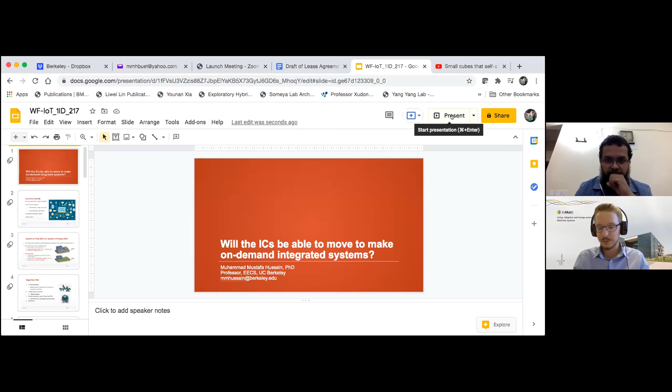So let's start with our first speaker of the day in our first session, who's going to give us an idea on how to make soft robots move. I'm happy to welcome Muhammad Hussain, who is a professor of EECS at UC Berkeley and was a founding professor of electrical and computer engineering at KAUST. Now this is your floor, Muhammad, and welcome.

Thank you, you can hear me clearly, right? Yes. Okay, very good, welcome everyone. I'm connecting you from Bangladesh at the moment and I'm going to fly out for San Francisco in less than 12 hours, so it's kind of a rush moment for me, but I'm very happy to be here because I would like to learn a lot about this robotics, and I do believe that there is a lot that can actually be done.

So here is the perspective that I would like to first present. Increasingly, we are living in a world where computers are not only used for computing, they are basically now being integrated into most of the things that we know of. And as we go forward, we know that there will be more and more biology integration, and that's where we see the Internet of Things as well as the Internet of Everything.

That means there is increased demand for hyperintegration. So there are two things happening at the moment: there is data management, and then there is data collection and data-based decision execution.

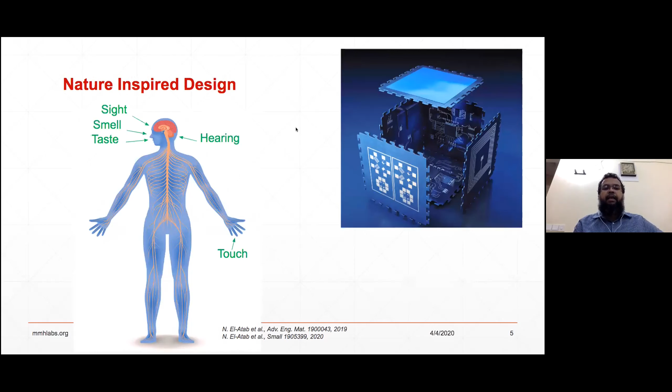But in our case, what I thought is, look at us, right? Most of our sensing organs are basically outside. Obviously our tongue is inside, but our ear, our eyes, our nose, those are outside. Our tactile sense, the touch, the temperature, the pressure, those are essentially in the skin, which is outside. But at the same time, our brain, our memory and logic part, is inside.

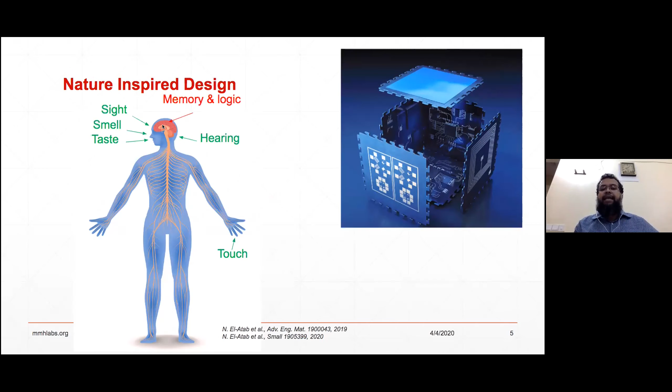That inspired me to think differently: if we use the substrate, the electronic material that we use today, on only one side to build devices, why not use the other side the same way? So we're building electronics where the sensors, energy harvesters, antennas are outside — here are the antennas, here's the solar cell, here are different kinds of sensors — but all the data management circuitry, the ICs, the battery, are basically inside, exactly like our body.

So what are the key characteristics? We are using thin film based components, using both sides, so it's area efficient. It's also cost effective since we're not using different substrates. It allows us to mix and match, because one side can be based on one material — say 3-5 material, just as an example — and the other can be made with silicon, which is 90% of electronics today. So I can do heterogeneous integration of materials and devices.

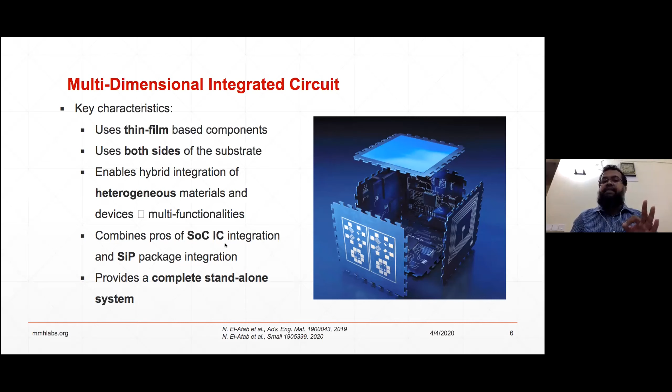It basically combines both system on chip and system in package, but they're essentially a standalone system. Here you can see the actual image of these systems, where all the sensors are outside, and the inside has the data management circuitry. Now, how are we doing it? We have wafers, we build devices, flip them upside down, build other devices, connect them through silicon vias, then we dice them and package them.

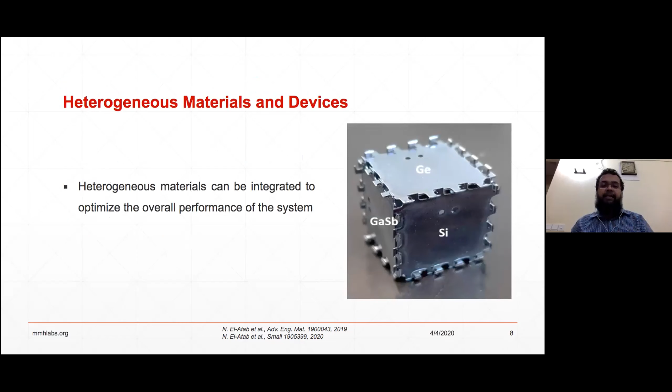As an example, this is a germanium-based substrate, this is gallium antimonide, and this is silicon. We call these multidimensional integrated circuits, because unlike 3D where you stack one silicon-based IC on top of another, here we can have different kinds of ICs and control different shapes, since the cubelet isn't only one shape. I'll show you that we can make pyramids, hexagons, octagons, different kinds of shapes. We've taken this approach because we expect them to act like robotic cubelet pieces.

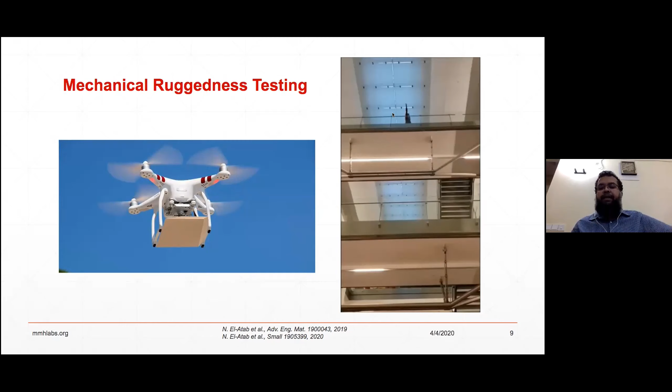For mechanical ruggedness, we did shock testing — from a 15-meter height, we did 10 drops — and the shock is absorbed by the PDMS or polymer-based encapsulation, which is mechanically robust. You can see here these UAVs: we took them, flew them up with the ICs attached, and dropped them off from really tall buildings, and we saw that they can absorb the shock.

So here is an example of this standalone system. It essentially has a temperature sensor, and it also has an LED, a microcontroller, and a battery.

The way that it happens is when the temperature is above a threshold, which we set at 30 degrees Celsius, the microcontroller turns on the LED. So you can see that every time the temperature went above that threshold, the LED was basically on.

Now if we move forward, here you can see what it looks like inside and how we're covering them. If you compare this with the video you saw earlier, that video had cubes which were essentially 5 centimeters. But now we are having 2 centimeter, 1.5, 1 centimeter, 8 millimeter. And this is a medical pill, a capsule. Then we have the 5 millimeter and 3 millimeter.

So essentially what we'd like to say is that these are scalable. Ultimately, they are a standalone system and they will be able to move, and then like Lego blocks, they are going to mix and match with each other to create a far more hyperactive integrated system on demand, where we can drop them off and they can assemble and reassemble themselves to have systems with on-demand manufacturing, and we don't need to actually be there to create a complex system.

From a scalability standpoint, I'd like to also show that the MDIC, or multidimensional IC, that we just showed, the stacking reduces the footprint by a factor of 12 compared to the traditional PCB, which is the ideal case. Just as an example, if I use the traditional system in package, I will need to build a system where all these different components have to be placed side by side monolithically in a lateral fashion. But the way we showed in this case, the cubic MDIC can have far less area consumption, so it's area smart, and because we're using two sides of the substrate, we have more advantage in terms of cost.

So here is an example of these water sensors on the outer side and solar cell on the upper side, with air sensors and encapsulation for floating capability. So what's happening here, as you can see, when we dropped it off, it had a certain kind of weight, the mass, and it essentially allows it to take the sensing side and immerse into the water. It's getting the water's pH, temperature, as well as other chemical concentrations from this water, which is very important for water security.

The way we've designed it, whenever the sensor side goes to the bottom, it's immersing in the water, while the solar cell side is always looking at the far face, the frontal side, so it can get sunlight to have the energy harvested.

So essentially what I would like to say is that when we look at robotics or soft robotics, we see that it's more and more an engineering of nature. We are learning from nature, and then we are mimicking that through engineering.

We do believe that the multidimensional IC, this new design concept for integrated circuits and electronics, will be able to be part of this journey, to assemble themselves, as well as multiple of them assembling to form far more complex integrated systems on demand.

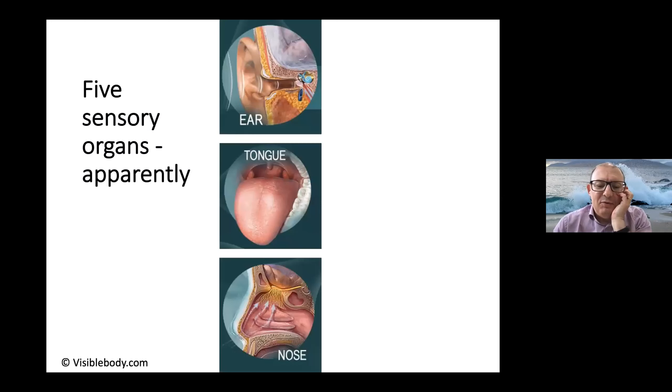But I don't think that's the topic of this talk today, so I'll skip that. So we have 5 senses apparently, and we also have 5 sensory organs, apparently. We have the ear, the tongue, the nose, the skin, and the eye itself. I say apparently because there are still a lot of questions, some are being elucidated.

I don't know if you're familiar with the recent work done in Nature concerning magnetoreception of pigeons, where there's an increasing body of evidence that you have a magnetoreceptor in the brain that provides pigeons with an idea of how to align themselves with the magnetic field of the Earth. That is, you will not find that in the sensory organ. I think there's still much to be discovered, but this is the conventional wisdom at the moment.

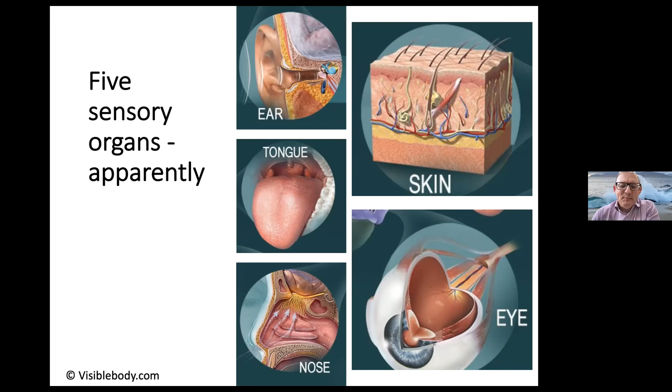It's always possible when you look at a sensory system to describe a functional schematic. You start with the sensor itself, which can be rather dumb by itself. The sensor will be stimulated, but you need some sort of data receiver, either coming from the sensor itself or something directly activating the sensor for information. You need to build an interface in order to get to your cognitive processing system, that is your brain.

Following that sensor, you might decide to have some actuation, or you might get information which will be going to your brain, and then this is a reaction that you're going to give to the system. So I'm trying to describe this functional schematic in order to maintain that sensory system.

You need some energy of some form, and there was a very nice work by Robert mentioning the combustion and other aspects of energy that you need. But you also need to be able to procure that energy in one way or another, procure it to the sensor, and also to store it and manage it.

And all that is underlined by a kind of knowledge base or firmware, if I take an engineering viewpoint about what that sensory system should be. In order to select whether or not the information is relevant to the cognitive processing system, you will have some criteria that you use to regulate all that and to have relevant information.

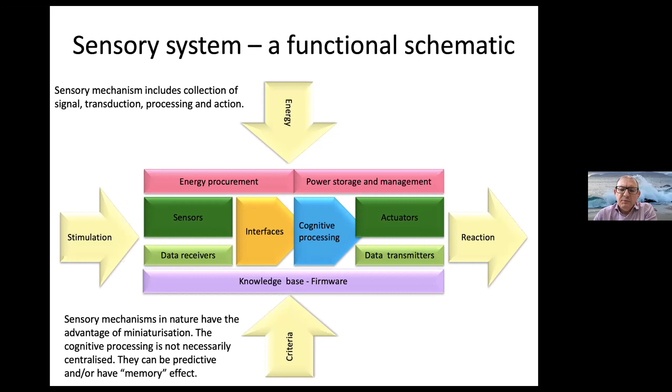It doesn't mean that because you have a functional system, this functional system cannot be broken into different parts. You can have parts which are in one part of the body, and one part which is completely outside the body - by body, I mean the robotic system you're going to have - or it can be fully embedded into it. This allows you to have some reflection, and then you can build this kind of workflow that Robert was mentioning, which is quite interesting, in order to make sense of the various parts.

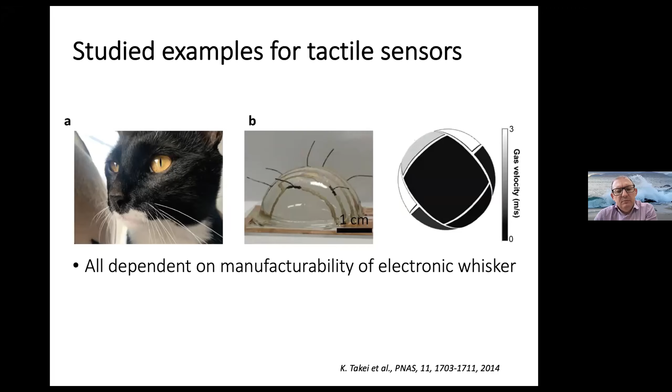Great work has been done, but it all depends on the manufacturability of these electronic whiskers. There seem to be, in my view, sensors which would be quite difficult to replicate on a mass manufacturing level. They tend to be quite fragile, so I'm a bit worried about the robustness in real life application. Don't get me wrong, I don't want to belittle that work. It's great work, but I'm trying to look at whether it would be working in real life applications, in the thousands, if we were to use it for biorobotic systems.

Another example is the actual sensor based on cracks - you can see the small arrow here. If you look at the broader picture of one of the legs of the spider, you have this kind of crack, and what you're relying on is looking at the variation of voltage as a consequence of this crack, which gives you an idea of the movement. So you rely on an imperfection, a voluntary imperfection of the actual system, in order to detect.

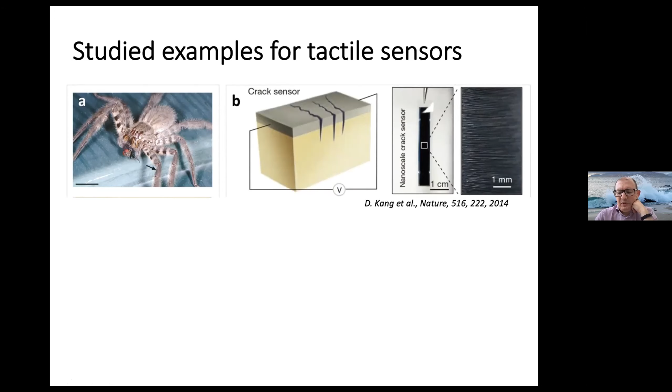Getting some haptic feedback. And again, it depends on the manufacturability of the crack-based sensors. So that is one aspect of it.

Dr. Kang created very nice work based on a carbon nanotube, if I'm not mistaken, or graphene. You want to look at the reliability in real life application - how many times those cracks can be used, how many cycles they can be used reliably, and whether you get reproducible results. This is some work I've been doing: instead of using cracks, looking at this kind of wrinkled metal layer, which has survived 1,000 cycles with bending of 180 degrees without any deformation whatsoever. I'll explain that a bit more here.

Then you have this other example of pressure sensors, this time based on the porous structure of a sponge. You have the very classic system where you have a porous structure embedded into an ITO film, and this very classic picture concerning the pressure on one side and the actual output response on the other side. You have these two curves, which are very classic of nanostructure layers you'll find, for example, in a piezocapacitive sensor or other type of sensor - this case being a piezocapacitive sensor.

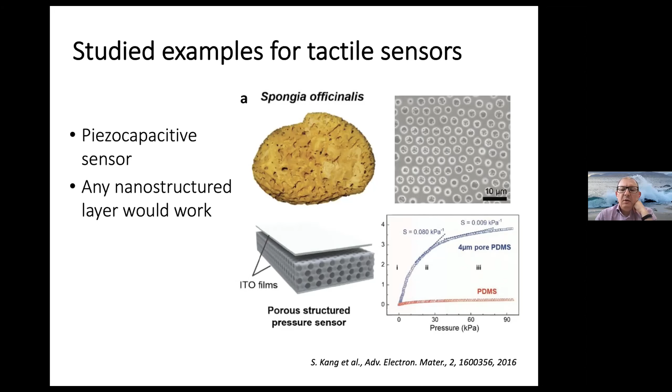Looking at all these examples, and I've spent a bit of time on that talk - over and above accuracy, you need specificity, selectivity, and so on. You will want to know what are the ideal specifications for your biorobotic sensor. First of all, you would like to have decentralized control if you can - that is, be able to have a sensor for which the intelligence is very nearby or even embedded, because that's something we have, for example, in our body.

You want to have something which is also self-powered and self-interrogated. By that, you will want power that doesn't come from the mains, something very close by as well. You want something robust and reliable - and I mentioned some of the sensors presented might not be the case. You want to have what we call built-in self-test, which is quite common in microsystems in general and also in electronics - the ability to auto-calibrate itself, but also to look at failures which could happen, and allow your sensor to fail gracefully when it's close to the end of its life.

But also something which has built-in self-repair. And again, Robert mentioned this kind of self-healing material - we have that happening just now in microsystems, in MEMS. It's been there a little while in electronics, not as much as we would like, but it's something I think we should have for these sensors.

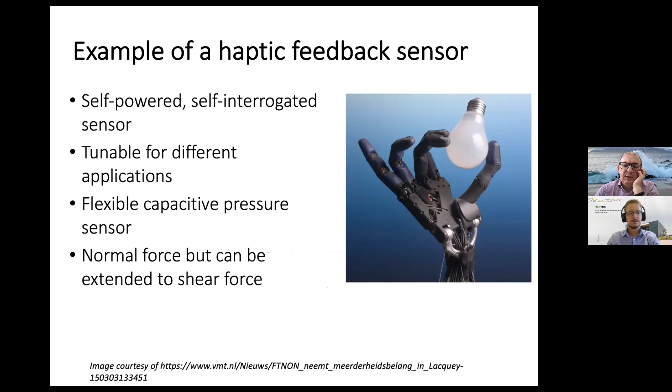So I'll give you a little bit of my commercial break here. We've been developing a kind of haptic feedback sensor which is self-powered, self-interrogated, and can be tuned for different applications depending on the pressure you want to measure. It's also fully flexible - a capacitive pressure sensor. It does normal force in its specific version, but it can be extended to shear force, giving you multi-directionality of the force.

It's based on what I'll call a 20th century technology. The reason behind it is it allows me to piggyback on the multi-billion pounds of investment that exists, and also to accelerate the actual take-up of this kind of sensor.

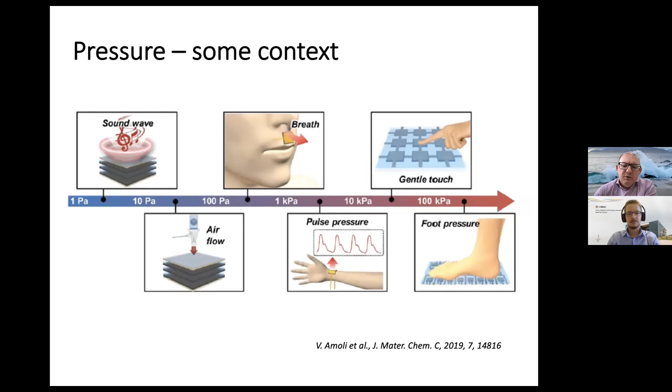To give you an idea about the pressure range: sound waves are typically between 1 to 10 Pascal. Breath is between 100 Pascal and 1 kilopascal. What we're interested in is probably pulse pressure and gentle touch, which would be in the region between 1 to 10 kilopascal and 10 to 100 kilopascal roughly. So this is the kind of pressure range we're trying to look at.

Coming back to the haptic feedback sensor, the one I manufacture is very simple. It's layers of PDMS with a nanostructure in the middle and just two coils made of metal. The way it works, it's basically an RLC sensor - as soon as you interrogate the sensor, you rely on the inductive coupling of that sensor. So it's a very simple system.

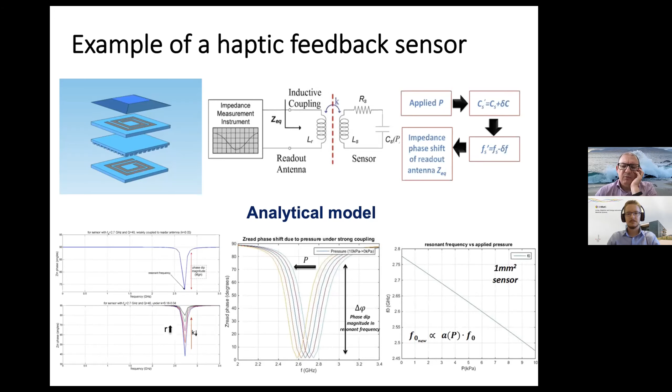The manufacturing process - we've done that with colleagues, Dr. Phil Hands at the University of Edinburgh - it's a semiconductor manufacturing process, but it's a self-aligned one, which is quite good. Most previous research relies on manufacturing the layers independently and then sticking them to one another. This is not the case - this is something where you build the system completely in one go.

And as I said, we went to bend that layer 10,000 times with actually no cracks whatsoever for that wrinkle layer. So it provides you a very good conduction.

And the intermediate layer is a simple microstructural layer based on a truncated pyramid, which are called frusta, I was told - a new Latin word for me to learn, which allows you to have this concentration point concerning the pressure, and therefore be very sensitive to pressure if you want.

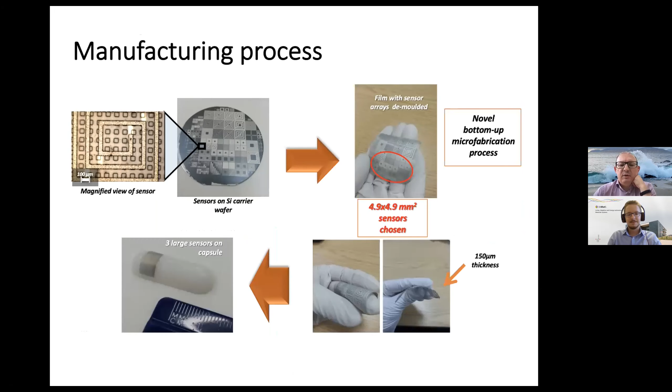So we have a kind of manufacturing process here, which allows you to create many things. You'll be able to characterize that in the response range that you want for the touch.

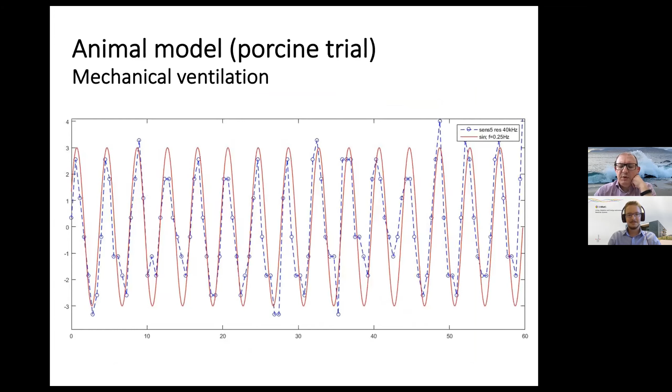And we did some experiments to use this kind of simple pressure cap, looking at a medical application. We've been able to detect, for example, the mechanical ventilation of a porcine, an animal model. This actual sensor is in the gut of the porcine, and we're able to detect the mechanical ventilation as well as the heartbeat.

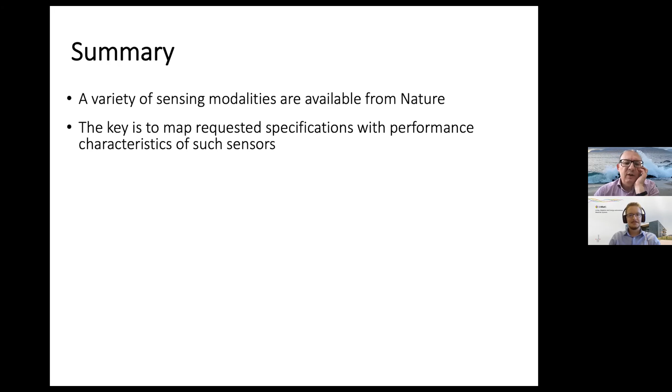So something based on a fluidic system. In summary, there's definitely a variety of sensing modalities available from nature. The key is to map your specification with the characteristics of the sensor and to translate them into a manufacturing relevant process. That's the key.

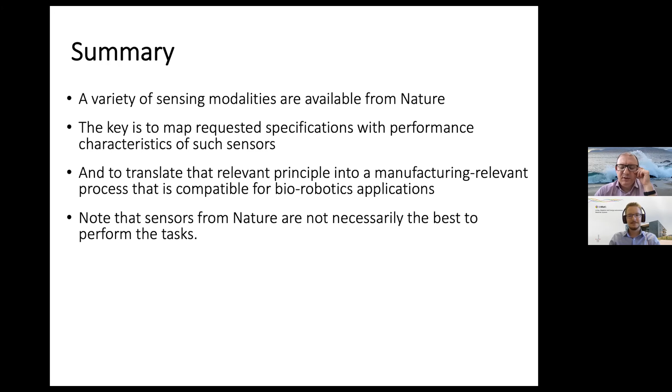But bear in mind that the sensors from nature are not necessarily the best to perform the task. You don't necessarily have the optimum sensors as in nature.

Okay, that's me. Thank you very much, and apologies for talking a little bit over my time.

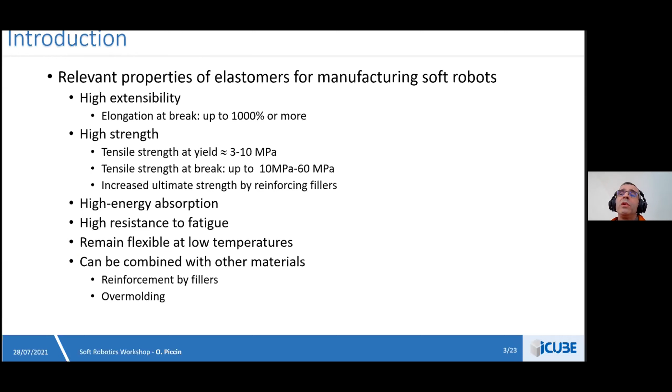So manufacturing of soft robots is a challenging task because, even if you restrict to the specific class of elastomers, the number of available nuances is very high. And this extremely vast range of materials can be processed by a very large number of manufacturing methods.

Furthermore, these methods have different features that can be continuous or discontinuous processes, direct or indirect manufacturing methods. They can be adapted to unitary or prototype, otherwise for larger production batches. And depending on that, it will change sometimes a lot of things.

And of course, the manufacturing methods are heavily dependent on the material properties. Parameters such as viscosity or curing parameters, as we are talking about polymers, are some important parameters. There is also a strong interaction among material, process, and design. Parts with a given geometry and a material family will generally require specific processes for manufacturing. The final product properties result from the complex transformation that occurs during the process on the input material.

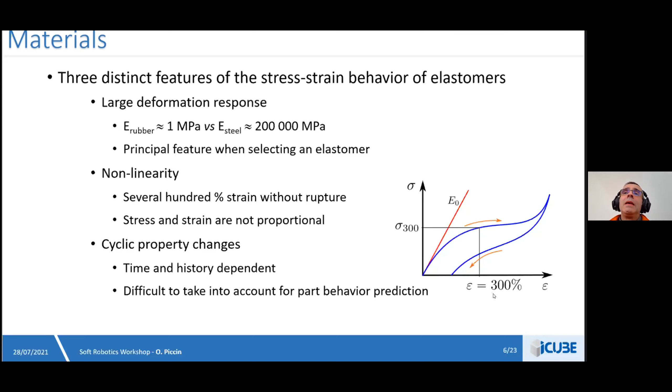So TS and TP elastomers have specific transformation processes. After a phase of mixing, TS compounds can be shaped while chemical reaction continues until the full setting of the crosslinks. The chemical reactions are initiated by heating.

In contrast, for TPEs, processing involves heating pellets to convert them into a hot melt, then shaping and cooling the hot melt to form the physical crosslinks and get the final part of the system.

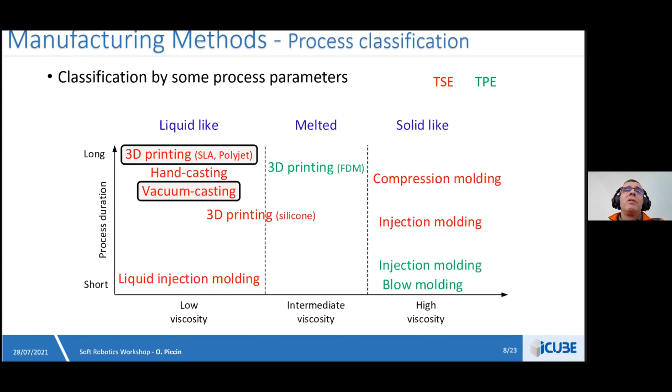Multi-material additive manufacturing printers are of great interest because they can produce parts with different material properties. The machine we have used here is a Stratasys Connex 350 based on polyjet technology. It can process a range of thermoset resins by photopolymerization and produce multiple digital materials. This technology allows direct manufacturing of prototypes with complex geometries that could not be produced by another manufacturing process.

This manufacturing process also has great apparent simplicity, but it also has important limitations. The first maybe is the rather reduced range of materials. This is typically machine dependent, with generally only a fraction of the performance of materials available for injection molding or casting. This is an important limitation. As material transformation is a complex process, the final properties are difficult to predict. Another point specific to the examples I will show later is that airtight or hollow systems remain rather difficult to obtain.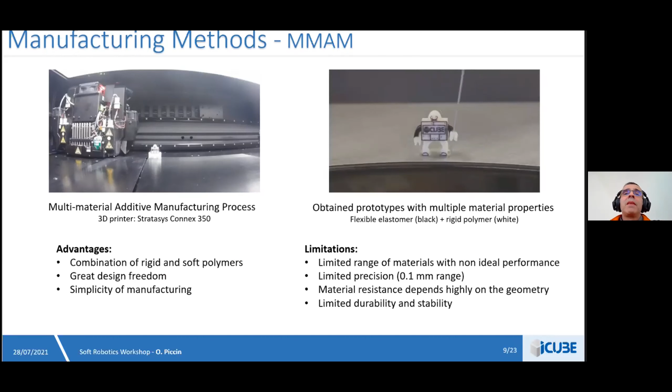So the system we have fabricated using this process was a soft pneumatic actuator produced with this multi-material machine. The general design goal for this application was to build elementary building blocks or units, each of them providing a small translation displacement or an angular contribution. Each unit forms a kind of deployable mechanism based on an origami or foldable, deployable structure.

So the proposed architecture for the system is based on an inverted honeycomb pattern with two configurations of the same pattern, allowing for rotation or otherwise translation motion. The objective was to fabricate this type of airtight articulated polyhedron.

Here is the design system that we have done for this, with the central deployable part monolithic, fabricated with rigid and soft materials. The closing of the units is done with two separate rigid plates. The most difficult part we had to do was the flexible hinges to produce, and we had to take special care to design the geometry of the flexible hinges.

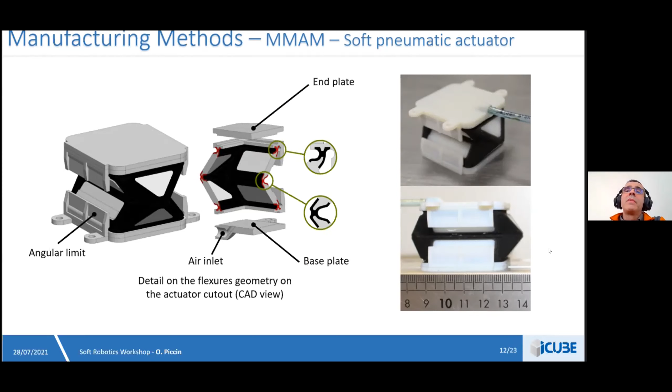This is the version with the rotational capability. In this kind of architecture, we have studied two types of hinges: the first with stiffener and soft materials, and the second with only soft materials.

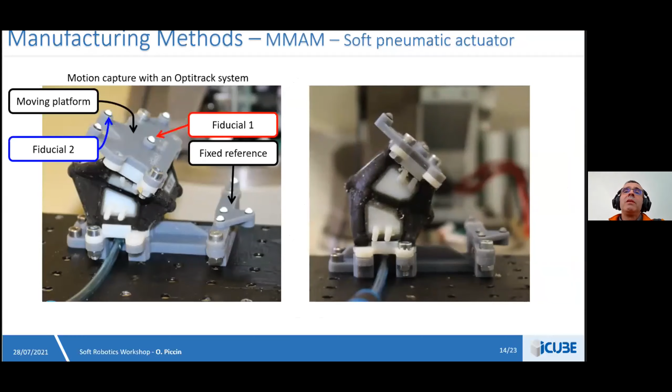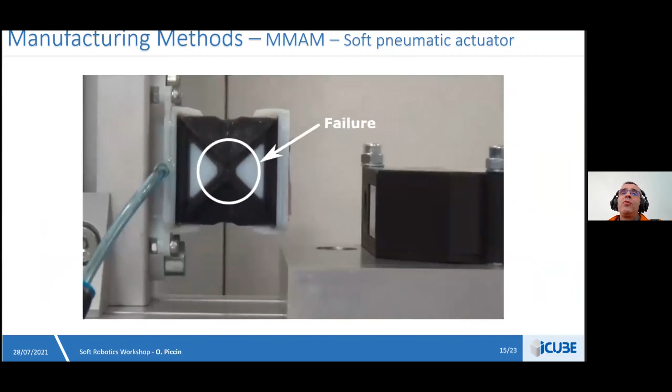We conducted different tests on the system. What we arrived at is that when the system is operating, you can see ridges from the multi-material process with combined loadings, especially at the top of the closure caps. And if you push up the pressures, the system fails at a pressure on the order of 40 kilopascal.

In this case, the soft material produced by the machine has quite limited strength compared to what could be done with regular silicone, if you have the capacity to produce with silicone. So another experiment we have conducted was to use another process, vacuum casting, which has different advantages.

The advantage is the variety of shapes and resins that you can find on the market. In fact, it's a myriad of resins, so it complicates the choice, but you have a very large choice. You can use this technique to overmold components.

This is important, as I already said: properties of final parts are predictable and can be easily repeated from one fabrication to another. The equipment is quite limited - you just need a vacuum pump and one oven to process using this method. So this is relatively low cost compared to the previous method.

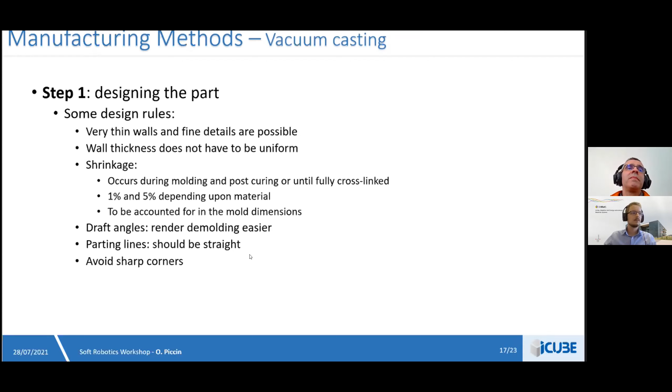Then the next thing to do is design the mold. What we have done here is a kind of revisiting of the fabrication of a pneumatic network using a split mold. We have done this based on what is done for parts produced in mass production. This type of element is very interesting to ease the removing of the molded part.

We had a video that does not work here. Okay, it's no problem.

When you are designing the mold, an important element is the position of the gate, for the good filling of the mold. Here you can see different elements, such as a good location for the different parts of the mold, good clamping of the mold, and also the placement of vents to avoid air entrapment in the mold and to avoid bubbles in the system.

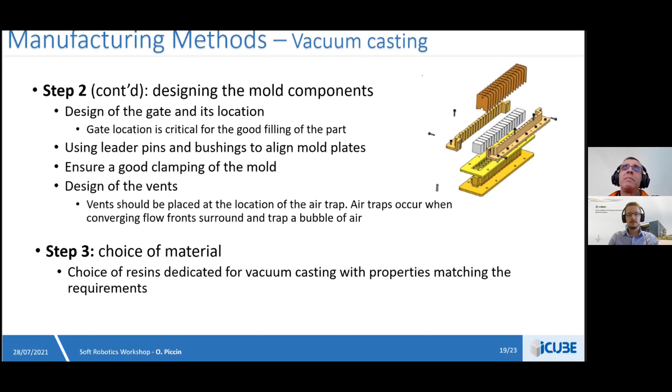For the choice of material, it's very important to make simulation to predict the behavior of the final system, and this can reasonably be done when you use resins, silicone resins, as we have done.

So the next step is the casting itself. You have to mix the elements, apply some release agent on the mold surface to ease the extraction of the part, and then the cure of the part is completed when you place the part on the mold in the oven. So the curing phase is activated by heat.

I'm sorry, this video doesn't work. Okay. The right one did work, Olivier, but we're running a bit out of time right now.

Yes, so this was the animation. On the right it works. In fact, we have made several pneumatic networks: one with a single air chamber, and the second one with a dual chamber. The project behind this is to make a gripper that will be capable of doing dexterous manipulation.

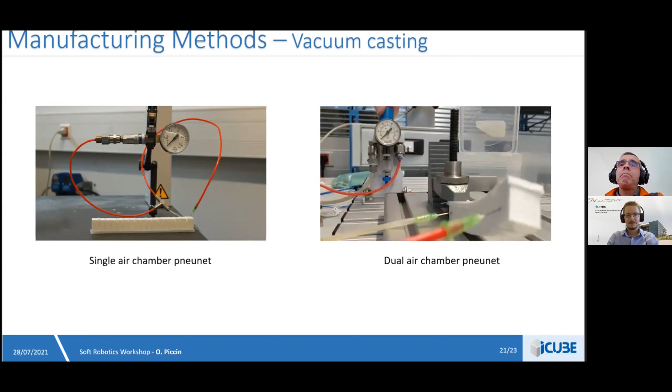As I'm running out of time, I'm just arriving at the conclusion. As concluding remarks, I can see that the selection of adequate trio of design, material, and process is already a difficult task for a single part, but it's even more complex for soft robots because they require lots of embedded features. Therefore, the production of soft robots does not seem to be feasible with a simple and single process, despite rapid advances in 3D printing technologies. Manufacturing of soft robots has not yet reached its full maturity.

And as I already said, the current methods still rely widely on trial and error. So maybe some of the difficulty for fabricating soft robots is about the embedding of discrete components. This is a recurring demand in soft robotics.

And to better predict the output results, simulation and also design tools need to be developed to overcome the difficulties of simulating discontinuous manufacturing processes of 3D printers typically.

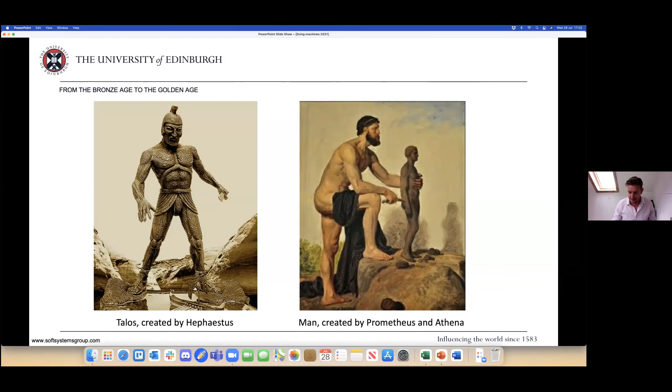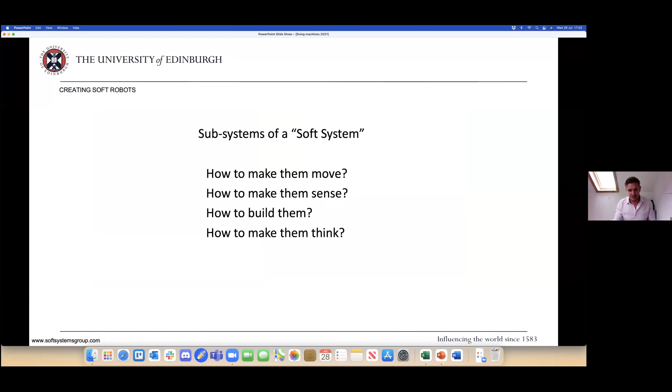The talks we've had so far covered making robots move, making them sense, and how to build them. I'm going to talk a bit about how to make them think. An observation here is that all of these are subsystems of a whole soft system—movement, sensing, thinking—they're all just typical classical subsystem architectures. That's very much one of the ways we look at problems in my research group: we decompose complex systems into subsystems and focus on making those subsystems work very well.

In the talk I'm going to highlight a few things: that robots aren't complex, that we need to make smart materials as stable subsystems of a complex system, that we get intelligent materials from interactions in complex subsystems, and finally that soft is something which adds value to robotics—it's not something anathema to it. In fact, it's something I believe will be the future of robotics.

In my teaching, I teach biology, electronics, and chemistry. In all these areas, we end up looking at complex systems and trying to understand them using successive layers of abstraction, architecture, and hierarchy to explain how things work. Really, biology, electronics, and chemistry are just ways of subdividing the world into different disciplines that we can try to understand.

And we do the same things in robotics. One of the things I really like is the parable of the watchmaker—a really interesting parable to look up. Basically it talks about the idea that in order to make stable systems, there's a lot of merit in making stable subassemblies. This allows you to make complex systems with fewer full-system errors than if you just make a system out of a complexity of parts where you need the whole system assembled, otherwise it won't be stable. It gives insight into the way we build complex systems in robotics, and the way complex systems arise in nature through these stable subassemblies.

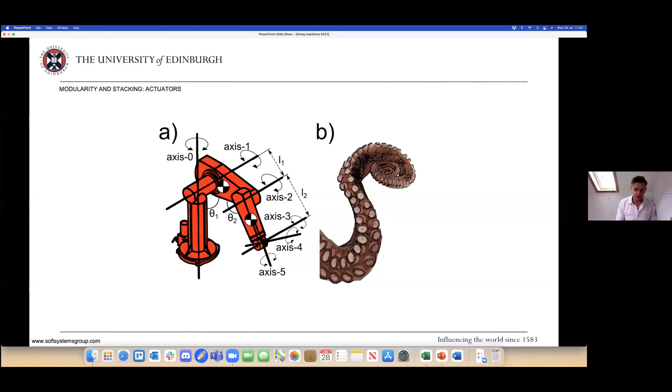If we take robotics as a whole, you can look at the tension between classical robotics and soft robotics as a diagram of a 6-axis robot versus an octopus arm. From the point of view of useful work, both systems do the same job—they can pick something up and move it from one place to another. You can decompose it in terms of translation and rotation matrices. Combine these together and this gives you basically the whole of kinematic-based robotics—simple ways of thinking about translation and rotation, making up big matrices, applying inverse kinematics, etc. It gives you robotics, manipulation, and locomotion.

Ultimately, what are robots useful for? Well, these sorts of robots, 6-axis systems, perform a useful task, which is manipulation, as that top-level description of task. The point being that robotics as a whole is not complex, especially these industrial-type 6-axis robots. They can look complicated, but actually the decomposition shows they're not complex at all.

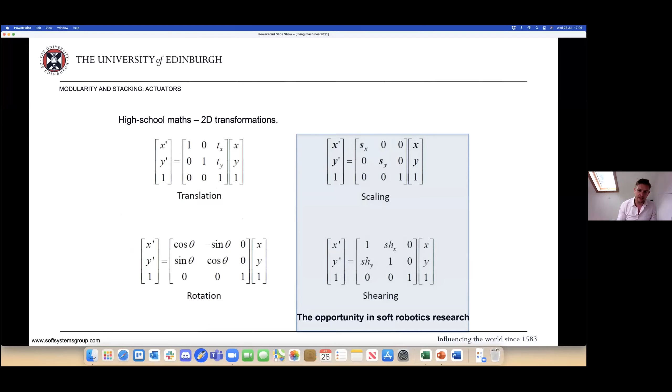An interesting thing, if you continue the analogy of looking at all possible two-dimensional transformations, is that the opportunity in soft robotics research is around the scaling and shearing matrices. Predominantly all of the work we've looked at has been around the scaling matrix. Why is that interesting? Because one of the things scaling gives you is this idea of dilation, and I think that dilation is really about how we can interface or interact with our soft systems.

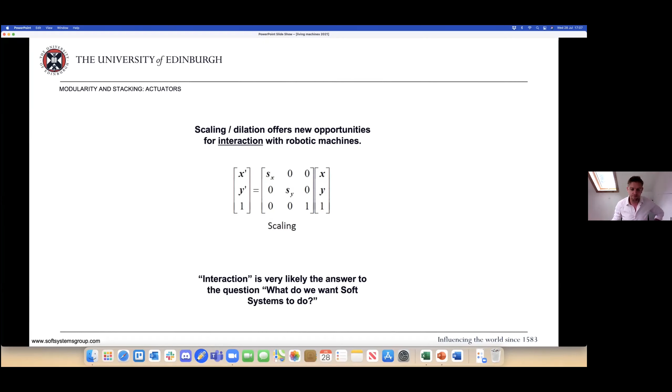The reason that's important is it gives us this question, often overlooked: what do we actually want soft systems to do? What do we want soft robots for? I would argue one of the major answers is interaction. The design of systems that bring in soft materials, living tissues, etc., looking at softness overall, is all about design for interaction. So we can look at a couple of examples of this.

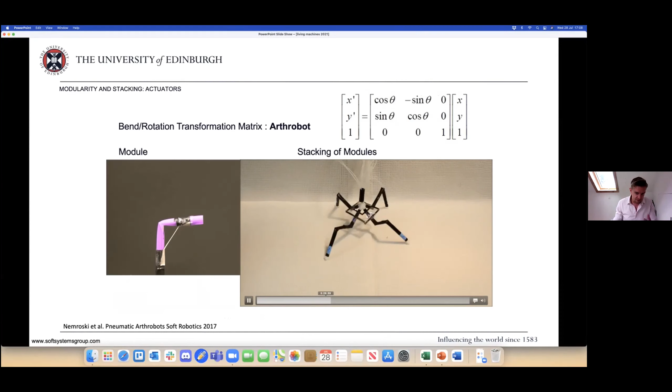You can use the same approach to look at a number of other robotic systems we've built, things which are able to bend. We can combine these stable sub-assemblies to make robots with really simple sub-architectures that end up becoming more and more complex with the way we build up the systems. Really this is about design for engineering—making soft systems engineerable through the intelligent design of the sub-assemblies that we can combine together.

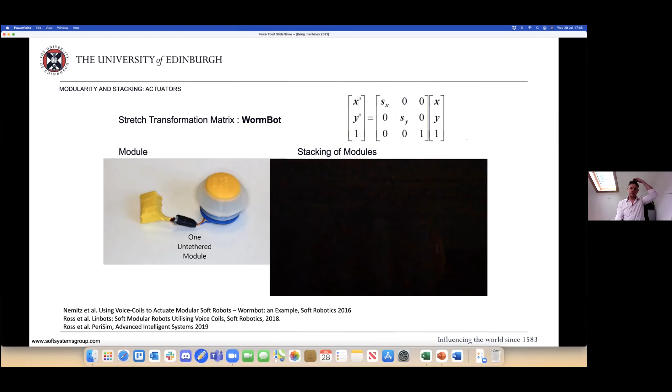Why is all of this important in the context of how to make robots think? Well, it comes down to this idea of thinking about the embodiment of systems.

If you take the argument that all of the robotic systems we've made in soft robotics, certainly in my group and from a number of other groups, they build upon this idea of stacking together simple sub-assemblies to make more and more complex overall systems.

This brings in a discussion about control and how you actually control the system. Rob talked earlier about the onboarding or offboarding of control. One thing you observe with offboarded control, which is predominant in all these systems, is that you've got a simple one-to-one mapping of control lines with the number of actuators. This brings into focus a question about how you control systems, how you make them more complex without ending up with a burdensome tether bundle.

It's a problem we've been looking at for a long time, and the answer really comes down to looking at fluidic logic. You've seen this in things like the Octobot, and there are a number of papers coming out now around this idea of how you onboard some of the control and physically build the robot controller with the same fabric used to build the body and the actuators. That's a really interesting move towards systems integration.

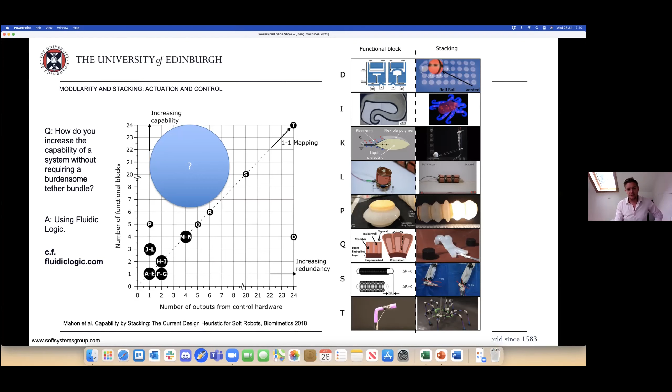This puts in mind the idea of how you do systems development. A lot of the systems we've seen in the past have been about taking a favored actuation technology and integrating them to build a system—simply stacking these things. In a systems engineering model, by contrast, what you do is start with requirements, work back down to the component level, and then build back up to the system. This speaks to the maturity of the field, that we're starting to have these sorts of conversations now.

One thing we've been looking at with that in mind is a task-based view of what you want robots to do, and being able to look at how you both design the controller for the robot at the same time as choosing the most appropriate actuator.

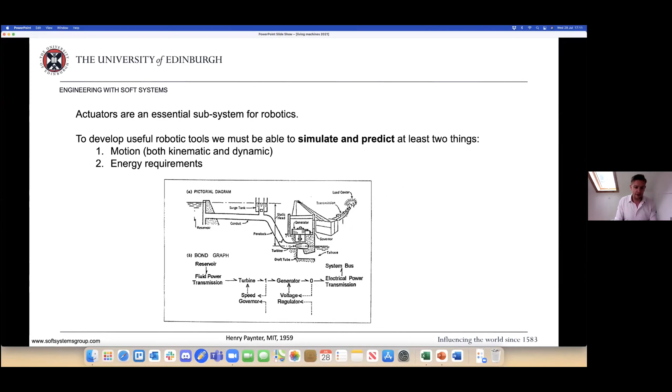One of the ways we've been doing this is by looking at energy-based analysis. This allows us to identify areas of loss, look at how we can get regeneration, and how we can choose actuators that are right for the task. I don't have enough time in this talk to go into a lot of detail, but there are a number of papers about this, and I'd be happy to talk about it in questions.

Basically, we can model our soft robotic systems in terms of energy source to energy sink, and the areas where they store energy capacitively or inductively, and where they lose energy through resistive losses. You can do this across all domains—not just electrical, but pneumatically, hydraulically, chemically, whatever.

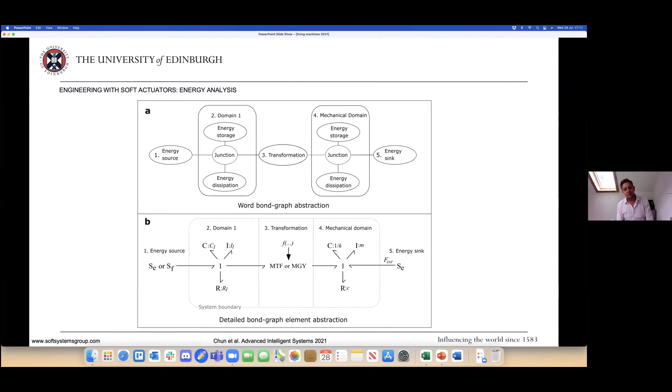We've got a paper just about to come out in Advanced Intelligent Systems, where we go through lots of common actuators used in soft robotics, and we decompose them into understanding how energy flows through them, how energy is transduced, and how it's lost.

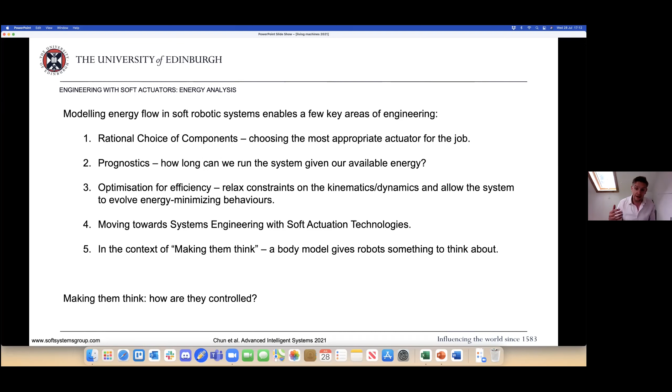In that context, a body model where we can model the dynamics of the system really gives robots something to think about, and gives us a way of being able to think about how we design an appropriate controller for them.

There's a whole talk in here, but one thing we've been doing is looking at examples of high levels of system integration, which you see in electronics, and trying to borrow that narrative to do this in fluidics. So we look at component level—fluidic transistors—and there are a number of different architectures that we've been playing with, and others are playing with, for how you physically gate the movement of gas or fluid from one place to another. Within this, you can start to think about how you apply that complexity on top of it, to allow us to do in fluidics what we did in electronics.

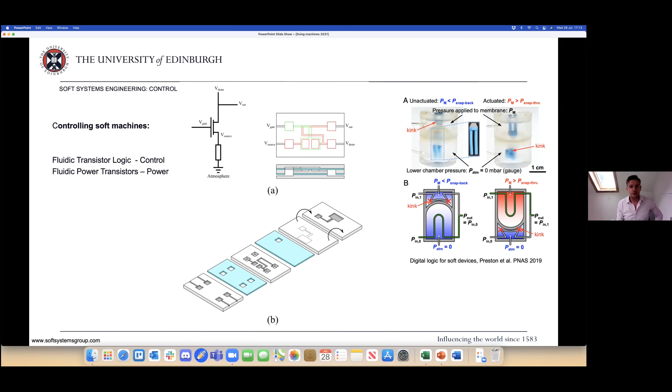So we've built systems that use combinational logic to make robots that can walk, with sequential logic. Now we can make robots in the same fabric as we build the actuators and the body, but they have a memory state to them, so they can understand something about state, which gives you ways of embedding history and algorithms into the system. The point is that control is a really essential subsystem for robotics, and to make really useful robotic tools, they need a control system that's of the same order of complexity as the body itself.

So the energy-based modeling allows us to look at how we model energy flows and how we look at interaction. And the control system allows us to design the intended behavior to respond to the environment and to think about task.

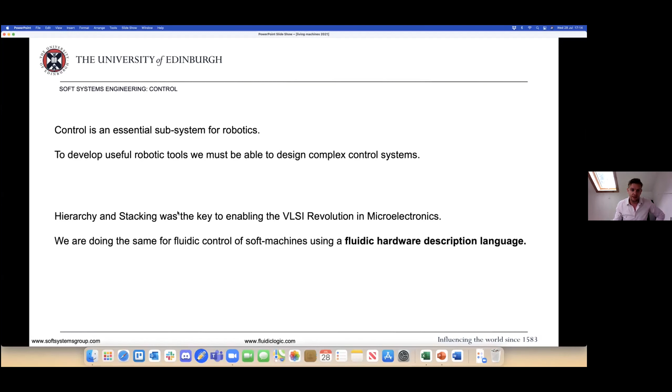One of the ways we're doing this is by applying a lot of complexity to our systems by putting on top of it a fluidic hardware description language, which borrows from this architecture that we see in electronics. It's a bit more complex in fluidics—there's a lot more physics going on, and a lot more tests that need to be done. But really, we're trying to take a lot of the tacit knowledge that people have from making soft robotic systems, and specifically the control architectures, and put that into a bundle of tools that enable you to design complex architectures and complex controllers.

The reason for doing it is to try to hide some of that complexity and embed it in the body of the system, as opposed to having everything as off-board control, which really limits the use cases for your soft robotic systems.

The other thing that's interesting is that at the last Living Machines conference I talked at, in 2016, we were talking about the Minimal project, which looked at how we can learn from things like maggots—in this case Drosophila larvae—and use that to understand how they function, both to inform the neuroscience and to understand how we can use those architectures to make novel types of robots that can perform autonomous tasks like navigation. These guys are really interesting—they can dig and do all sorts of things. We got interested in this idea of bridging the biotic-abiotic divide, bringing in microelectrodes and cells to build these sort of synbio robots.

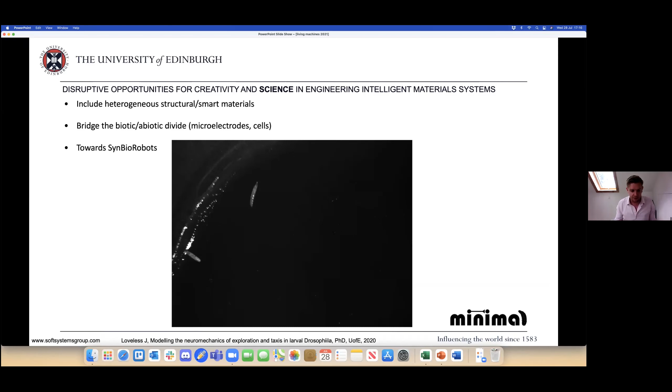There's a number of people in this space now doing really good work. But there are some observations I think are really interesting, because one of the things going into this project was trying to understand how Drosophila larvae compute and think with such a small number of neurons in the brain. Jane, a PhD student in the group, working with Barbara Webb, did some really interesting work looking at the neuromechanics of the Drosophila larvae.

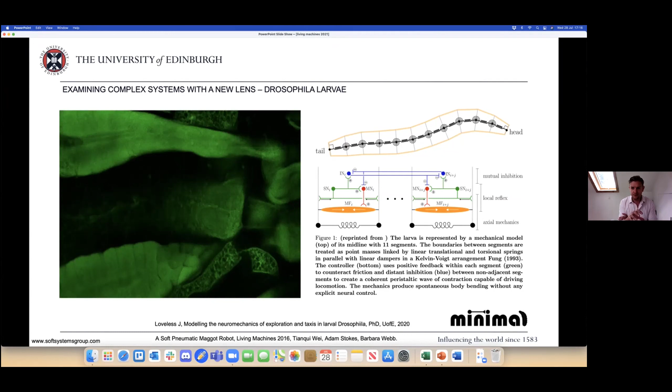The reason why I think this is really interesting is because it challenged the assumptions in the field. By building up a model that was not just a controller and not just a body, but actually a full neuromechanical model, Jane was able to show that if you really get into the nuts and bolts of what's going on in the Drosophila larva, you can start to think about a different neuromechanical model of chemotaxis—one that doesn't rely on learning per se, but instead looks at the way motor neurons can be silenced by olfactory systems, which changes viscosity, which can bias the way the maggot moves, making it end up seeming a lot more like a Braitenberg vehicle than like a sentient organism by itself.

I think this is a really interesting insight about stable subassemblies, and also about the bridge between systems that are alive, systems that aren't alive, and what control looks like in biological systems versus abiological systems. There's a lot of synergy there that's really going to be interesting to explore in the context of how you make responsive, intelligent robotic systems that can perform all sorts of functions, but that maybe don't require the same level of control as a 6-axis robotic arm, for example. It opens up different sorts of tasks, and it brings to the fore all sorts of interesting questions about what robotics are, what they're useful for, how we build them, what the architectures look like, and also challenges some assumptions about nature.

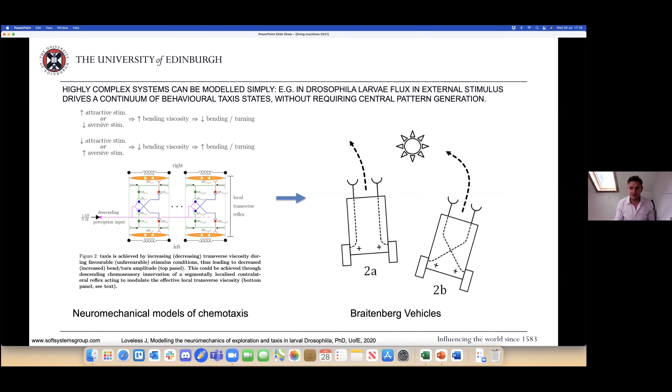There's a number of really interesting things happening in this space, at the intersection between the world of built things and the world that builds itself. There's work from Marcus Buehler looking at materiomics, the intersection between living and non-living systems, and the work from Mike Levin on xenobots, which really starts to look at the refactoring of life and how you can build complex organisms.

So things about how do you make robots think. I think one proposition is that smart robots need intelligent materials. Another idea coming to the fore is that physical intelligence is as important as artificial intelligence in embodied systems, and not just in soft robotic systems, but in robots as a whole. It's about design for interaction—the physical intelligence of what the system looks like and how it interacts with the environment is what drives movement or the interaction between the system we've built and the world that interfaces with it.

The point about making responsive systems from well-engineered stable subassemblies is that when you can make responsive and stable subassemblies, you can design for emergence. And when you scale the granularity and make more complex systems, you start to see behaviors that you didn't explicitly design.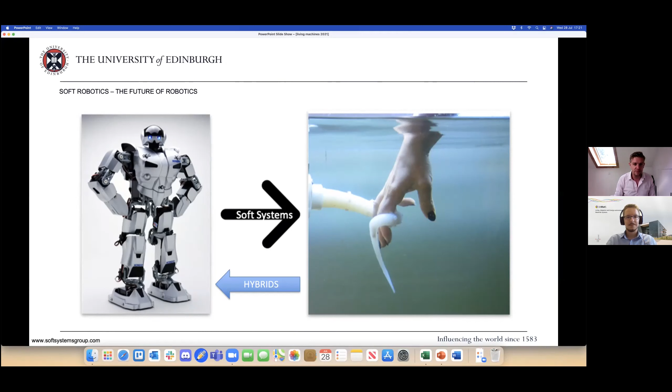So with that, I'll finish up. A few links to funders, etc., and work that's been done, a lot of it by my research group in Edinburgh.

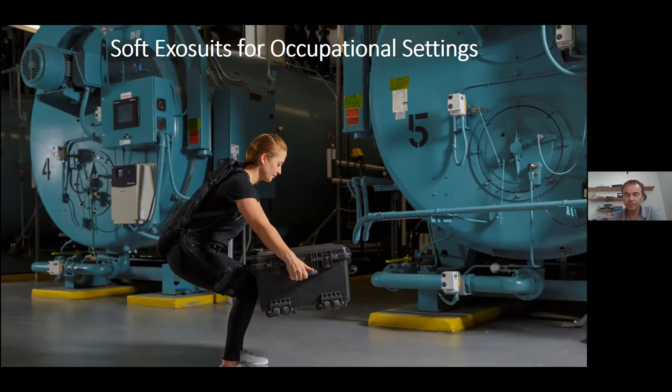But I'll take a step back and focus most of this talk on the educational side, and it'll be fairly simple in terms of its content. I'll give a perspective of what we've done over the last 7 or 8 years or so, as we've thought about leveraging soft robotics for the purpose of outreach and education.

This may be cherry picking a little bit, but a lot of robotics and education hasn't changed that much. People are still selling and using pretty traditional mechanical systems where you're assembling discrete parts together. They come prefabricated, and the goal of a student or educator is working on putting these together. There's some creativity enabled, but the disciplines are fairly limited, and the amount of creativity or potential is also a bit constrained.

A big thing that we noticed early on was that there was a lack of materials and manufacturing often associated with these STEM robotic kits. That was something we thought could be interesting to leverage for new soft robotic STEM kits. So this is kind of like, why use soft robotics in education.

I touched on some of these already, but it does emphasize materials and manufacturing much more than prior soft robotics or robotics educational materials. I think inherently there needs to be a fair amount of creativity put into designing and fabricating these systems. So I think it's exciting to students, and they really have this infinite set of possibilities about what they would be able to do.

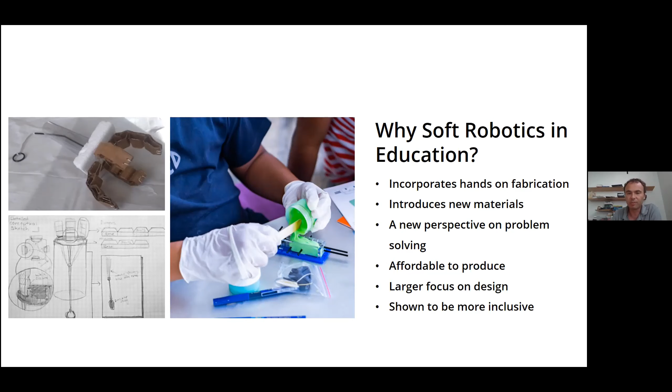That's important in terms of training people to be better designers and innovators. And we think that it can be quite accessible, like I mentioned already. So these are just some pictures of students who have been working in workshops on soft robotics.

Beyond high school students, we also think there's an opportunity in research. There's a number of research groups here today presenting that focus on soft robotics, but often, because this field is relatively new, if a research group doesn't have experience in this area and wants to get involved, how do we create pathways for them to quickly get up to speed and start working on their own soft robotic systems, even if they haven't had that prior experience or domain knowledge.

There's no real textbook you can buy on this stuff. A lot of the material has been developed over the last decade. The field's moving quite quickly. So how do we create platforms for enabling researchers to get started? That was another thought we had early on in this project.

That led to the development of the Soft Robotics Toolkit. I think we started this in 2014. Dónal Holland played a big role in this as part of his PhD. Basically we wanted to develop an online portal that helped collect a lot of the information from the field and make it shareable across different groups, maybe helping others get started in this area if they didn't have experience in it.

So you can go to softroboticstoolkit.com. I think we're okay, but maybe not great at keeping the website updated, but there's a lot of great content on there. We've had a lot of interest from the broad community—makers and hobbyists—we get emails from people just looking to get started in soft robotics. We've run some competitions, which I'll talk a little bit about.

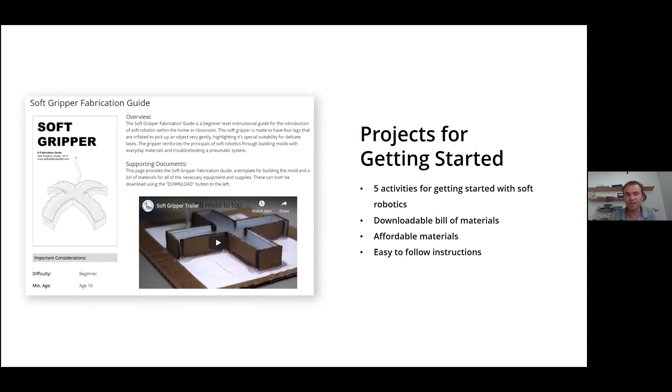But obviously a person still had to acquire all the materials themselves. They could follow all the instructions that we had provided.

Additionally, we've tried to put together case studies on there. This maybe isn't super up to date, but there's been a lot of new exciting work with demonstrations and applications, so some projects highlight what's the potential for soft robotics, to try and inspire people and to potentially think about other applications.

And then the competitions, I think, was a very exciting aspect that we ran, and many people in the field volunteered their time as judges to judge the submissions. We had a high school level, an undergraduate level, and then a graduate level competition.

I think almost 1,000 students participated in various different types of competitions, where we either got them to upload some exciting new material based on advances in their research if they were a graduate student, or if they were a high school student or an undergraduate student, we got them to demonstrate something cool with the kind of content and material that was accessible on the website as well.

So this was a way to also generate more content for the website. By participating in the competition, you had to upload your work, and then that becomes accessible to other people. So it was also meant as a way of continuing to encourage sharing amongst the community for all of these different projects.

But then one question we had about 2016 was, as we were in these competitions, we were hearing from people that they still had a challenge in getting started. They had to source the material, find all the tools. And so even for some educators, there was this barrier or perceived barrier to getting started, where we were thinking about how would we make this even easier for people. So that's where the idea came of developing some pre-packaged physical kits that people would be able to use to get started.

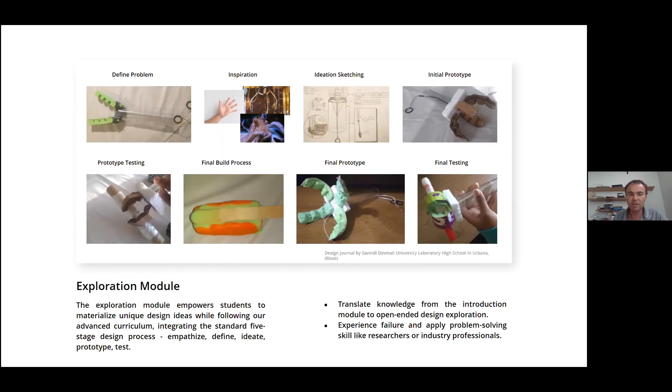And then after they go through and build that, then we say, design a gripper for some other exciting application. And so maybe this isn't quite as sophisticated as what they're doing building the introductory kit, but still they're able to go through this process of thinking about maybe different geometries, different designs, different materials. And really this is where they get to exert their creativity and build something based on their own ideas, rather than just something that we're asking them to build directly. So we're excited about this idea of introductory modules and exploratory modules.

And then recently we've been running some pilots. Because of the pandemic, we had to think about how we run workshops virtually. So we started this with collaboration with Holly Golecki at UIUC. They have an after school program with some high school students. So we trained an educator and then we ran this where we provided materials to every student's home, and they went through this virtually and were able to all build a version of the gripper that you can see here.

And we also ran a bigger pilot in India, and we had a collaboration with Tata Trust there, where we sent this to I think 6 different schools. So we had a workshop over 40 hours where we trained the teachers, and then the teachers ran this workshop with their students doing this at home. And so we really like the idea of this model: train the educator in these materials, have them gain confidence in it, and then make the materials accessible and affordable enough so then people could do this in a classroom or in their home in the future as well.

Beyond high school students, we wanted to think about how to enable the research community to get started. This is a control board that a former postdoc, Panos, built back in 2014, which we put online with instructions for how to build a simple control board. Many different people just built this themselves off the design, and it was exciting to see many research groups leverage it.

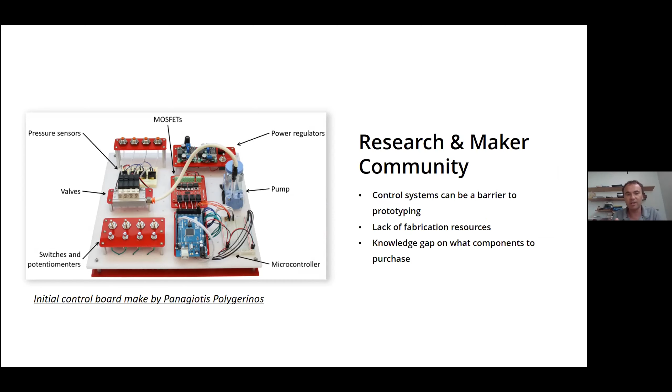Former Harvard students started a company and started selling these at cost, and I think Facebook or Oculus actually bought some of them, which was pretty cool. But we definitely recognized that this wasn't very sophisticated and was really just a first pass.

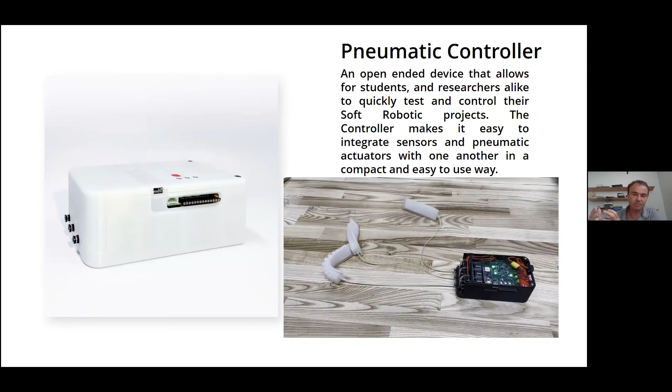More recently, we've been trying to think about how we might make a more sophisticated version of that control box that we could share with the community, so people could perform more sophisticated or complicated things, do more advanced programming, have a greater number of degrees of freedom, and have it be more compact, portable, or wearable. This is something we hope to release sometime soon.

It's been an ongoing effort by a bunch of people in the lab, trying to make something that isn't so tiny but is still quite portable, with instructions to go along with it. We've already piloted this in a graduate class that I teach.

In addition to the control box, we also have some introductory labs, like making the Pneunet actuators that Adam and Rob showed, as well as different types of sensors or actuators, to allow people to get started.

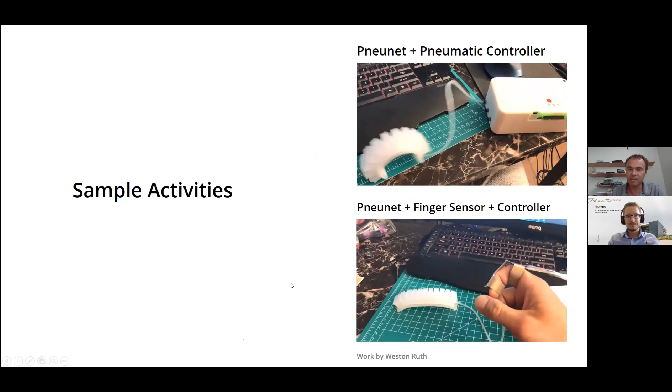It's exciting to see that very quickly, someone with no experience in soft robotics is able to get started, make their own actuator, connect it to a sensor, connect it to the box, and get it to move. That's really when people start to think, what could I do with this? It's lowering the barrier to entry for getting started in the field.

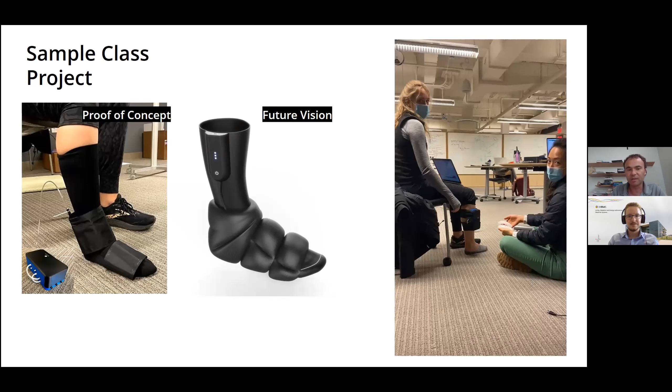I'm going to stop there and acknowledge that there's been a lot of people involved. We're partnering with other groups giving us very helpful feedback. A lot of lab members have contributed, Donal Holland and Holly Golecki more specifically to some of the research aspects. Thanks also to Rob and Adam, and others in the field contributing ideas and content from their students, and helping judge the competition. It's been a really nice effort to see the community get engaged together in this. So thanks.